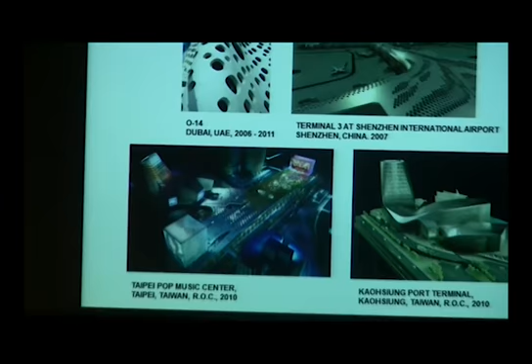These are the four projects. I'll only touch on the Shenzhen Airport project, which is a regression off of O14. But they're in very different circumstances—of course O14 is in Dubai, and the Shenzhen Airport is in mainland China, near Hong Kong.

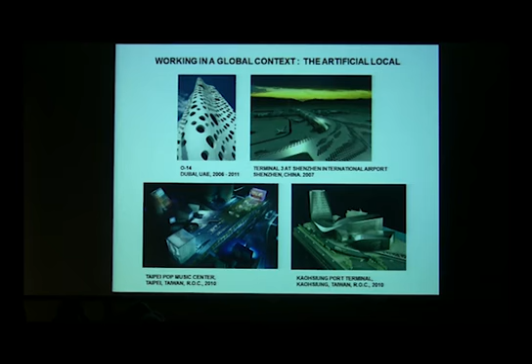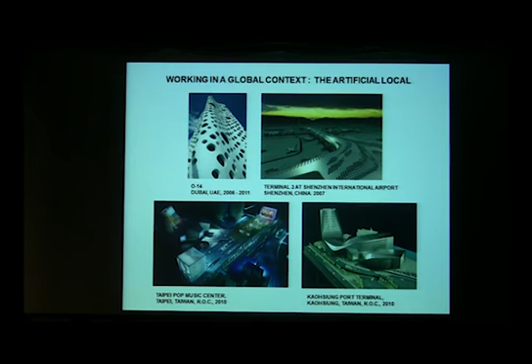The two projects we won in competition a year and a half ago, Taipei Pop, is characterized in terms of its ambitions—the ambitions of its programmers—to be a project that doesn't relate just to Taiwan, but attempts to really project its image and presence across all of Asia. They are particularly threatened by the rise of the pop music industry in mainland China, and so the explicit intent of the project is that form of projection.

And of course the Kaohsiung Port Terminal connects back maybe to a more traditional notion of maritime infrastructure—an architecture that sits on the border between land and water, and in a way partakes of the global systems of shipping, is at once part of the city, but also connects to wider, extended systems of transport and exchange.

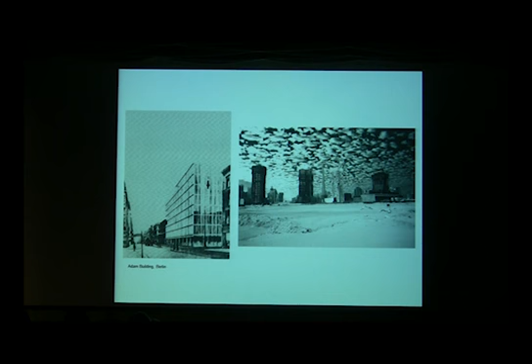The long view of the building was very important, as was another given: the issue of developer pressure. Looking back at Colin Rowe's fantastic essay, Chicago Frame, one of the quotes he puts out is that the architects accepted the conditions imposed by the speculator, and we certainly did.

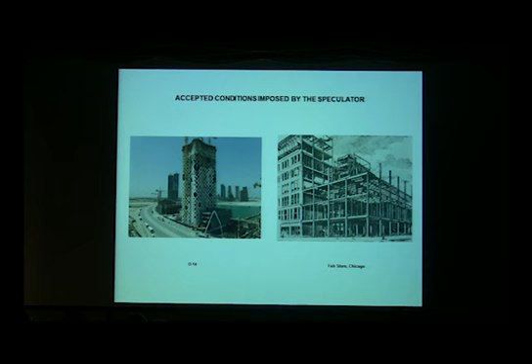But the conditions had radically shifted, in Dubai of 2006 versus 19th century Chicago. So it wasn't about putting up the most minimal frame and getting the most out of all the square footage, the most efficient building. These buildings were, in a sense, loss leaders. The iconic trumped any issue of efficiency - or was efficiency even expected? We were given a tremendous amount of latitude. The building couldn't be inefficient, but that wasn't ultimately the criteria the developer judged the project on.

The other thing that happens in Dubai at the urban level is the almost reflexive use of certain kinds of building types - the tower type, and then the creation of a back street, a back building with basically a kind of podium that the building perches on and extends behind for parking.

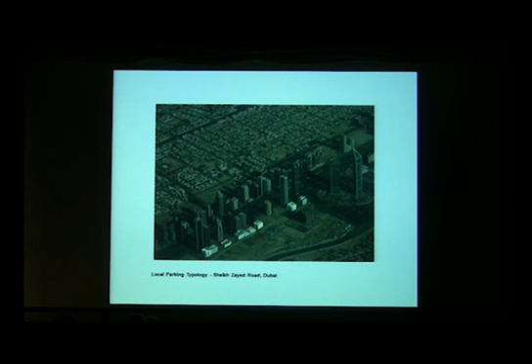So you get an active frontage for these towers along Sheikh Zayed Road here, and then a completely dead back street, occupied by parking structures.

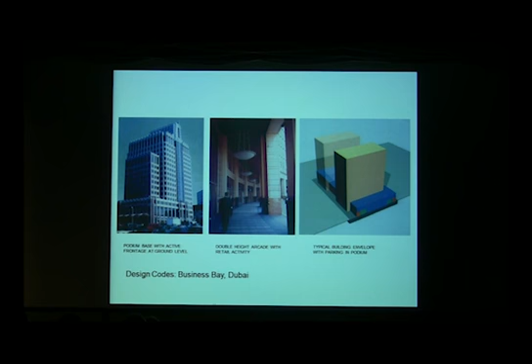So they included the podium base with active frontage, a double-height arcade, and then this provision for parking in the podium. Working with the developer, we basically tried to overturn or modify those rigid strictures.

Instead of just one level, we proposed multiple levels of activity in the building. That would assume that the buildings and the podia could be linked together. That ultimately didn't happen, so our building is a kind of little segment of the ambition.

So there's a utopian dimension to the project in that if the development were created correctly, you could actually get an active ground plane and an active elevated podium level as well. That's part of the project.

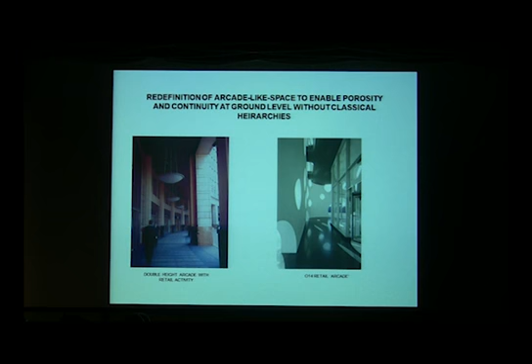The arcade in this case was reread as part of the kind of exoskeleton shell. Not an applique, but really kind of inherent to what happens if we separate the exoskeleton from the lobby and make it porous.

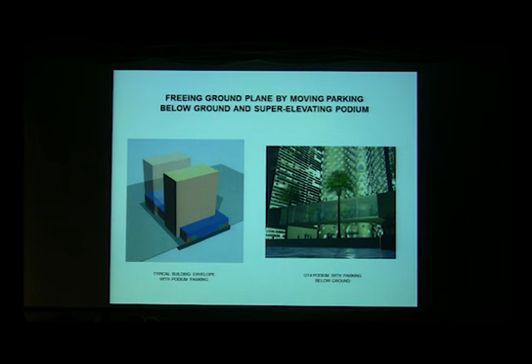It also addressed, at a purely pragmatic level, the issue of stuffing the podium with parking. Because the building was on a very prominent site next to the water, it didn't take too much convincing to argue to the developer that he should program those spaces and put all of the parking below grade.

So this diagram basically illustrates most of the issues that we were working with: this elevated podium, opening the ground plane up, a very modernist sort of move.

So the podium itself, instead of going all the way to ground as is typical when loading with parking, we super elevated it, so it's higher than the Lever House podium, and really made it a kind of gateway from the back street to the waterfront esplanade.

Okay, I'm going to digress for a second. This has nothing to do with the O-14 project, but it is an important issue for me. And that hinges on the issue of aesthetics and performance.

I am a lover of bicycle parts, obsessively. One of the things I found really interesting, I was just attracted to these things. I remember being so attracted that my teeth hurt. This came out in the late 80s, the one on the left.

The one on the right I can't stand, and I'll tell you why in a second. But the one on the left, which is a crank set, part of the C Record gruppo that Campagnolo did, came at a point when the computer was just being introduced in manufacturing.

And Campagnolo still had his old team of tool and die makers. It was very equivalent, in a way, to the situation at Peter Eisenman's office that Greg talks about, where he wanted to do drawings that looked like a computer did them, but didn't have the computers yet.

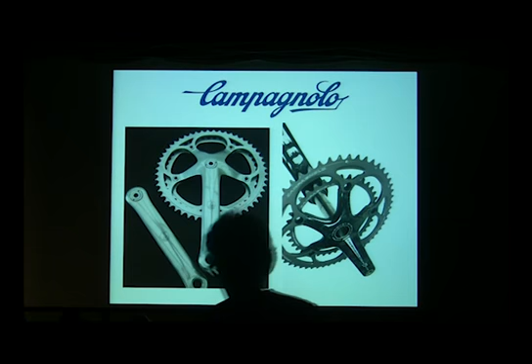It's probably a very reactionary position to take, but the gruppo on the right, which is actually done with everything now completely computerized - they're able to analyze all the stresses on the carbon fiber and lay them up and do all of that - but at the end of the day, from the purely aesthetic dimension, I would say that's a kind of a loss rather than a gain. And so I think when it comes to architecture, that's a really interesting problem.

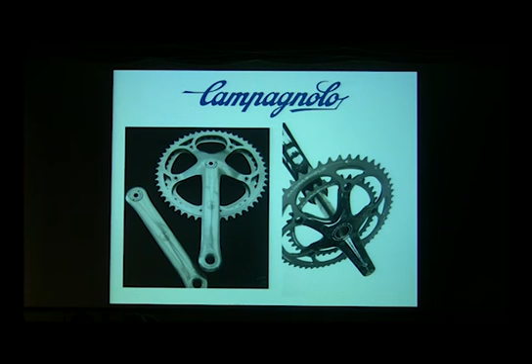Of course, it's not going to fly in bicycle racing, because the crank set on the right is going to win the races. But in architecture, performance, I would contend, shifts to the object on the left. Anyway, that's my harangue, and I will get back to the rest of the presentation.

So, one of the other things that I think is really interesting in the project, and when we're sort of speculating on the project, comes from what has happened in terms of the relationship between production now and production as it was once framed by people like Walter Benjamin.

Benjamin talks about the mountain as being quintessentially of a place, unique, original, and unmovable, and it produces the effect of a distance. I realized that now we're able to produce those kinds of effects, using Deleuzian terminology, as a deterritorialized presence that is very ambiguous, very hard to place, certainly not a rooted presence, but partakes of those effects of distance that were formerly part of nature.

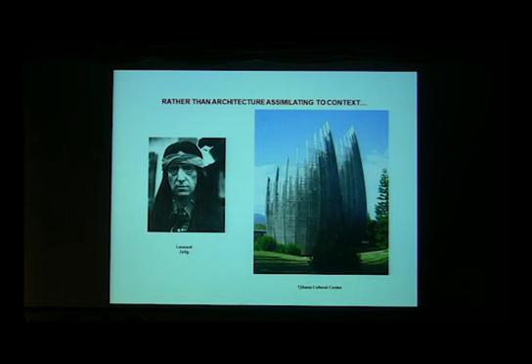So I bring up these two figures, two comedians, as illustrations. One, the Zelig model, and Zelig, of course, is the quintessential shapeshifter. He becomes anything he's close to. So that would be the old contextualism, I would say. And you see that in these kinds of projects where there's an attempt to update traditional culture, crossing high-tech and traditional culture together.

What we're really interested in is another comedic figure, the Chauncey Gardiner model, or as Jeff Kipnis corrected me, his name isn't Chauncey, it's actually Chance, and Chauncey is only one manifestation of Chance the gardener. He's characterized as being dumb as a post by the maid, and yet everybody reads deep meaning into him. He's basically a revealer of the context rather than the other way around.

So with O-14, just in the way it's been received, people have interpreted basket weaving as part of the process, and I don't deny it. In a way, I think the minor arts do kind of enter into this kind of work, but one could also say that those minor arts were, in a sense, an early kind of cosmopolitan structure.

They're sort of everywhere and nowhere. Everybody has baskets in all cultures, crosses them. Not new, but very old. And equally, at the level of interpretation, people have compared it to cheese or laundry baskets. Russians are absolutely convinced that it came from Melnikov's house. So it's a really interesting territory because it's very cagey.

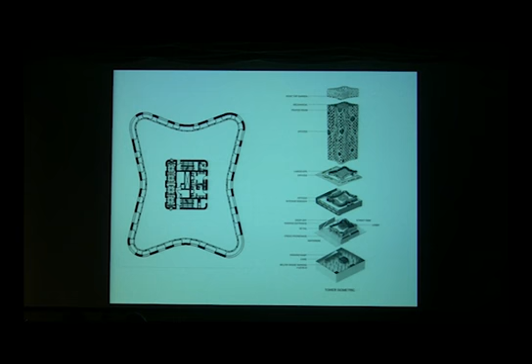So really the building became planimetrically very simple, a kind of soft cruciform structure, an exoskeleton about 1 meter away from the floor plate. The exoskeleton does all the work of holding the floors up. There are no interior columns. And because it's such a robust structure, like a reactor cooling tower, the core could also be much lighter because the exoskeleton takes all of the lateral forces that are normally taken by the core.

And the building evolved from being more of a typical column frame building. It was also mixed use at the beginning, so there was residential in the deep cruciform, and then it bellied out to office in the first iterations. The market changed, there was a redesign in terms of the kind of programmatic demand, and then it became only office.

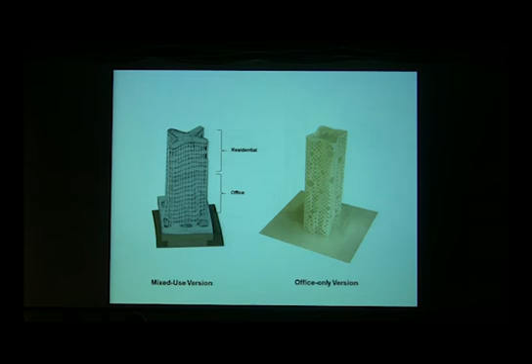And again, looking back at Rowe's article on Chicago Frame, I was particularly struck by one of the digressions when he talks about the anti-frame, which is the Frank Lloyd Wright St. Mark's Tower. And in a sense, and again this is kind of retrospective analysis, the O-14 project is sort of the inverse of the Wright project. The Wright project has a very strong central core that carries the building, cantilevers out, and has these spinning trays.

Our building takes that kind of central core and expands it out, and then the slabs hang within. But it is related, I would say. It's probably the closest project I can think of in the lineage, away from the frame. And then this is notionally what happened in the project: the columns migrate out to the surface, become an exoskeleton.

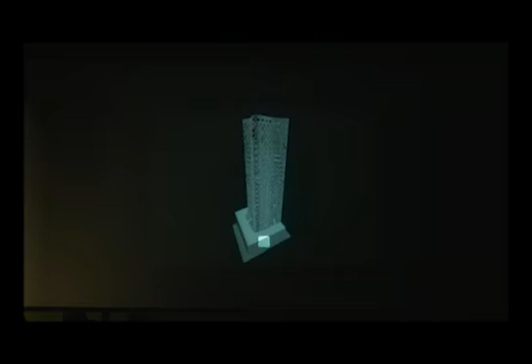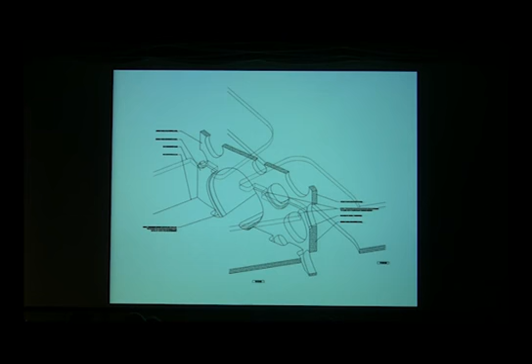There were very interesting moments too when working through the changes in thickness of the exoskeleton, where the shell changes thickness abruptly above the podium. So we had to find ways of detailing the openings that crossed over that transition zone, which created a kind of reveal that you can maybe see in some of the photographs, and in this isometric, that basically overlapped the two different shell thicknesses.

And as a consequence, I would say, of the use of the exoskeleton, we found that it induced a chimney effect. So after talking with a mechanical engineer and adjusting the number and thickness of the connections, we were told you could achieve a 30% reduction in cooling costs. But that was really a kind of byproduct of other interests and agendas, rather than something we focused on explicitly in the beginning.

That leads me to another thing - I don't know if it's a harangue, but it's something I think is really important to think about, and something that was really troubling me for a long time: the issue of sustainability and how we, in our profession, deal with that. And I realized that at one level, the purely quantifiable aspects are fairly free of architectural content.

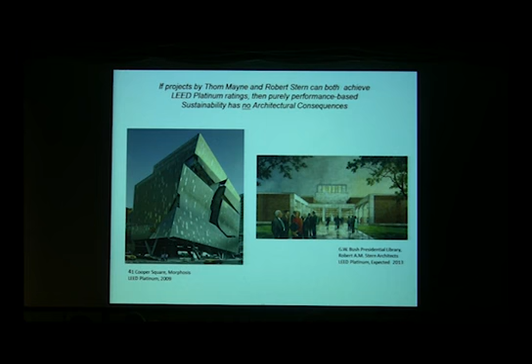Both of these buildings have LEED Platinum ratings. They both perform on a purely numerical level the same, and yet their forms couldn't be more different. So if Thom wants to represent sustainability, that's fine, but it's really not necessary - it could be anything, when it's purely based on performance criteria, which I'd say is a liberating condition. And I thank God there's no sustainable style. Not to say we don't and must follow those constraints, but they really are fairly neutral relative to architecture.

This doesn't work. The other thing we were really working on in terms of the detailed design of the form of the building is that we finally weren't going to be so much involved in complex form, but that all of the complexity would reside in the pattern.

So I was looking at two kind of contrasting models and trying to put them together. One is a kind of featureless monolith - I was really struck by the pyramid of Cestius in Rome, where you really couldn't tell how big it was because it had no features on it at all. So in the mist it could either look gigantic, or when you got up to it, it was actually shockingly miniature. On the other side, a figure with excessive features, a disruptive camouflage pattern. Bringing those two models together was really our interest.

I'm going to the wrong one - I think I'm going to a completely wrong animation. I don't know how this skipped. I think I'm going to need some technical assistance here for something I've juggled. So that's way at the end. I want to go back. Keep going, keep going, up, up. Okay, yeah, thank you. Very fluent in PowerPoint.

One of the things we started to play around with, because it is a diagrid structure, was to try to defeat readings of height. We realized that in a normative diagrid, you get the slabs to line up with the crossing points. So we deliberately put those out of phase, and it becomes very difficult to read the floor levels as a result.

There are even blogs that attempt to compare and contrast and figure out those things. So we were successful, and worked through a lot of different iterations. Also here, the goal was to try to defeat obvious flow lines through the diagrid - to track the actual pattern of flow that would follow along the diagrid. So we got a series of discontinuous cusps that could transmit the forces sufficiently, but didn't read as an emphasis of the diagrid.

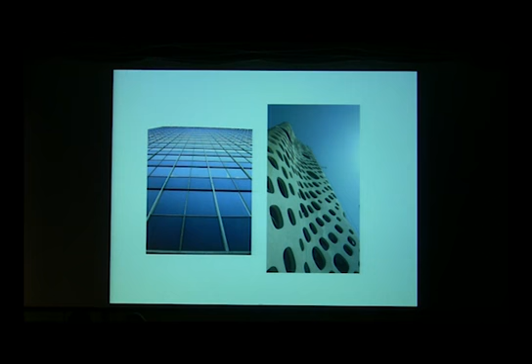Another thing that was important in producing this facade was the kind of up-close experience - very different from the one-point perspective you'd get in a typically gridded curtain wall situation. Instead you get different speeds of diminution and expansion across the facade, rather than focusing on one point. It also resonated with some of the stuff I saw as a kid, the Sea of Holes in Yellow Submarine, where up and down, side to side becomes very ambiguous. So in certain aspects, you get that kind of effect.

The other thing was the issue of the office space itself, and the question of how the office might be occupied in a spec office building.

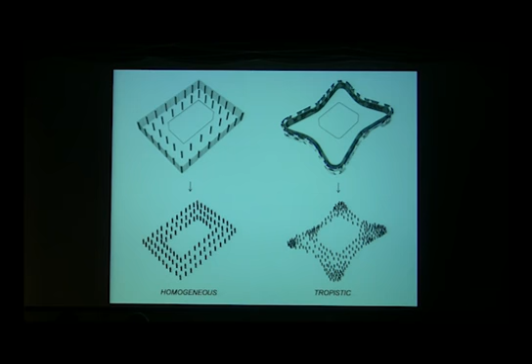So these are speculations, really, since a building persists over time. The hope is that there would be a much freer way of using this space, depending upon whether you want to be close to a lighter zone or a darker zone, and how you would lay claim to a space when you have technologies that are light and allow you to be flexible and not fixed to a certain part of the office. And so there's also a more concrete set of effects that operate too.

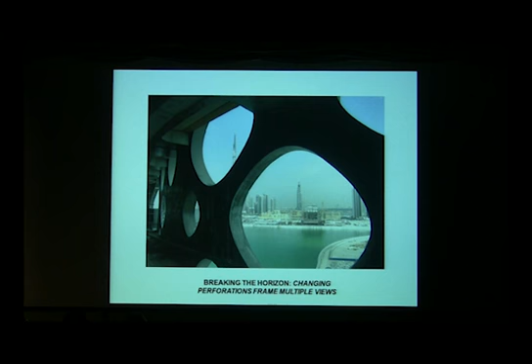Because this diagrid is a meter away, you don't have a kind of reinforced horizon like in the gridded buildings, but are able to get strange oblique views up and down and to the side, past the level of the slab lines.

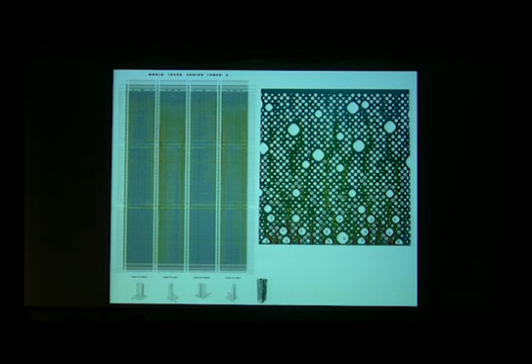I'd also like to say, in terms of the way we do projects in the office, we don't restart projects from zero, but try to take material we've been thinking and working through and apply it in a different way. So this is our proposal for Shenzhen Airport.

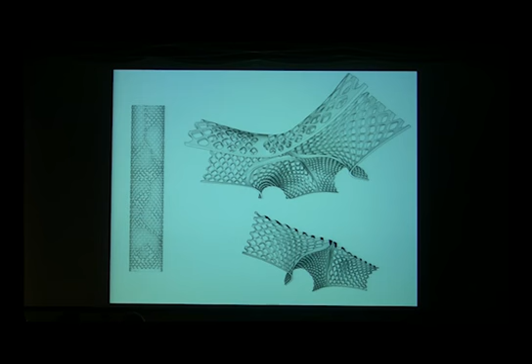I won't talk too much about it, but in effect it's the development of the O14 model on its side, upping the ante. So instead of completely perpendicular cuts normal to the shell, we began to explore the idea of varying the sectional cut, essentially keeping the outer fenestration completely regular—so the cladding and glazing would be regular, but everything behind it would shift.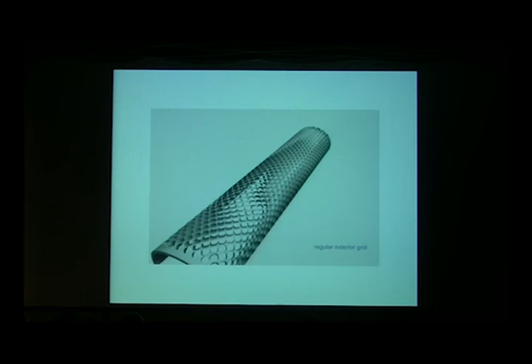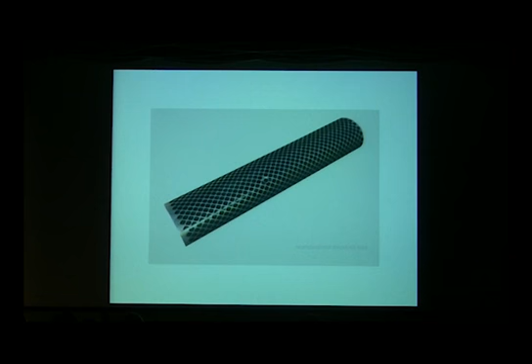That would produce a whole series of atmospheric effects in the vault, and you get a kind of virtual form emerging—it might almost look lumpy or irregular, but actually has a completely uniform cross-section. Here are the glazing panels, demonstrating that the outer surface is regular while you work with the sectional variation.

That then also connected to different agendas, whether we were putting fenestration in laterally or on top of the vault. So people traveling on the travelators could get glimpses—there would be a periodic use of holes angled toward gates that you could see from the travelator—and then another pattern agenda for the roof, which was much more atmospheric. We also experimented with reintroducing massive columns to direct people in the space and really make a plastic sense of the space, not doing clear free spans anymore, but really exploring the issue of the column.

In terms of fabrication—jumping around here—for O14, we originally had rubber molds that could be reused. That was dispensed with by the contractor, and we instead used foam molds that were automatically cut with automated wire cutters, and they were waste molds.

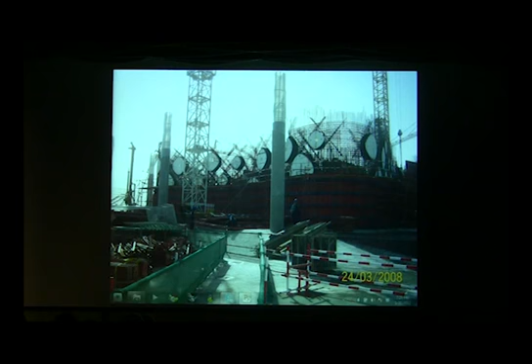So they would pour the concrete around the opening, and then it was smashed out with hammers. The building was a kind of learning experience, certainly for us, but also for the contractor, because there were no clear precedents about how to deal with placement of formwork and efficiency.

This was one of the early shots when they were placing formwork up in the diagrid, using transits to level them and so forth. They finally came up with a much more straightforward projection method, where they blew up images of the unfolded pattern onto the shuttering, and then placed them directly.

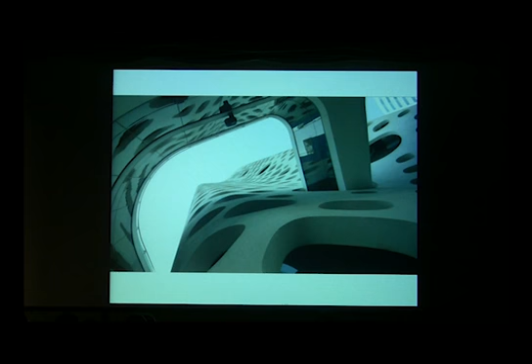This is just a view from the top of the building when the shell kind of emerges free. Ridges that connect the podium move through the shell, from the podium through the shell to the office space. And again, that gap in the lobby space, and one of those views between the glazing and the shell, with the ability to look up into that space.

The reception desk took longer to design than the building. And then a view from the back, so you see the podium wrapping the back of the elevated podium, a super truss that allows for the cantilever.

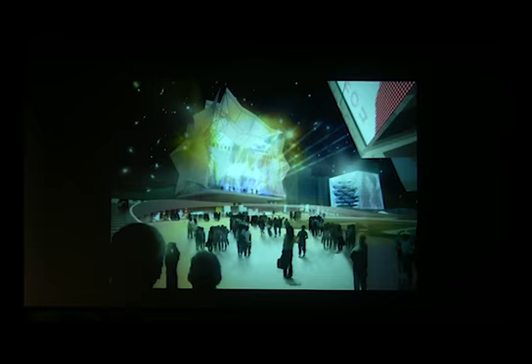Okay, I'll move on to the Taipei Pop Music Center. As I mentioned, it was a competition held about a year and a half ago, motivated by the perception that the music industry in Taiwan, while it was really the originator of pop music in all of Asia, was rapidly being overcome by the burgeoning industry in mainland China. So they wanted to finally give an identity, a place for the production of Taiwanese and Asian pop in the city of Taipei, and they really wanted to create a new kind of precinct in the city that would do that.

So the site is actually two sites, a very difficult connection of two sites: one across this Xinsheng Road corridor, a very long site, and then this more rectilinear site, bracketed by two major subway stops. It's right now an industrial area.

So our idea was to create not only the buildings, but to create this precinct that would bridge across the road, creating a new elevated ground. It would be connected to the city, but would also clearly be a very different experience once you ascended to that new plane and encountered the different programmatic elements of the project.

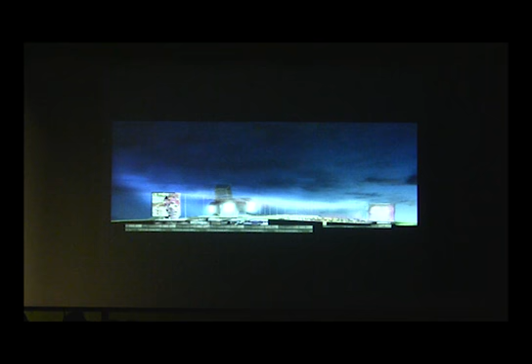So that cube on the left contains the Hall of Fame, and carved into the face of it is seating for 450 people to look out over the complex to see the events, and also for Hall of Fame induction ceremonies and so forth.

The idea we started the project with was that we didn't want a stadium, which would be a completely closed organism, separate from the city, but some form of a modified circus scheme, where instead of closing the ends off, we would open the ends to the city, and one would gradually rise up, and then that simple circus axis would branch off and connect to the adjoining site that would have the auditorium on it. So the main circus form was for the outdoor performance space, and then the other areas.

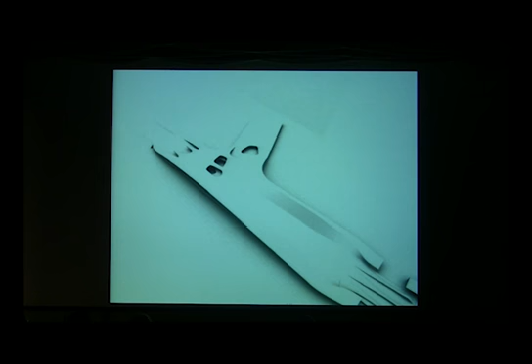So this is the notional animation of how that worked: cut the two ends off, elevate, and then bridge. And then the basic components are there.

One of the things - this third component is a stage. The stage in this position is for the 14,000 event, but it's proposed as a robotic stage that actually runs across the site and connects to two different places, to the other elements.

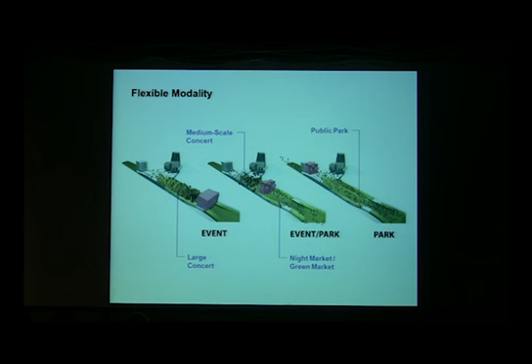The issue of flexibility was also very important for the urban operation of the project. For a large concert of 14,000 people, the stage would be at the far end of the site, essentially closing off the site. But if the stage moved, in its wake you could have a completely open and free event park. And when the stage went all the way over and essentially kissed the cube of the Hall of Fame, it became completely open park space.

This is a view from the main auditorium looking at the robot stage as it's parked in front of the main hall. This was an early rendering of the open 14,000 person venue, and we were proposing at that point a median net that provided some shade but could also be illuminated. You'll see that in an animation shortly.

This is another modality for when it's an open park, a view from the Hall of Fame cube. That eroded face has seating for 450 people, so you get a very intimate performance space and scale. We were really trying to work through the various permutations of scales of performances and types.

This would most likely be more of an acoustical performance, not an amplified one. We ultimately ran into real trouble with amplified sound in the open space, so I'll show you where the project is now. But this is the view during the competition—you can look out over that completely open space from the cube.

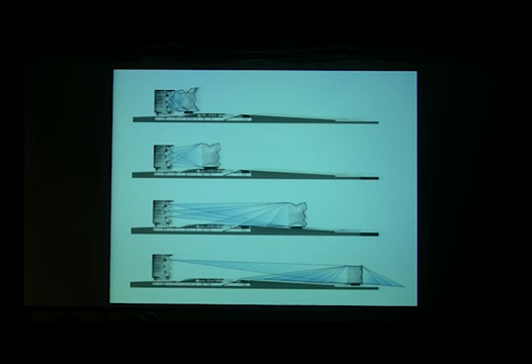The end. Yeah, this is good. Yeah, this is fine. Thank you.

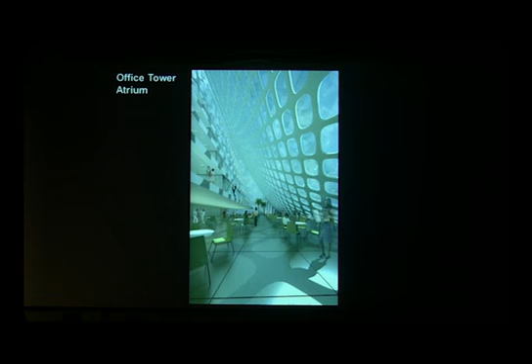This is one of the vertical spaces in the office tower that's above the atrium space, above the theater. It's really a kind of thick, elevated ground plane that would actually be occupied with shopping and have all kinds of functions within the thickness of that elevated ground.

This is the latest iteration, a quick rendering. We've basically had to enclose the outdoor space entirely because the sound codes in Taiwan are so stringent that they require library-level sound around all the buildings, which is somewhat absurd because the noise of trucks and cars is actually much louder than their sound code. But this is the battle we're facing now.

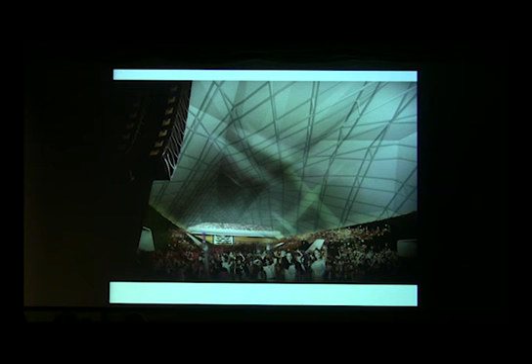The outdoor space is now an enclosed space, and we're making the end of the space modifiable so it can be opened up and then closed for performance. But the idea of keeping the public space open remains, so one can walk or use this vast shed for activities other than concerts. It's now got a kind of hippodrome form with a cantilevering balcony and a U-shaped audience, but the central area is essentially just a series of gentle flat plateaus that allow you to walk through the building, using this as a kind of enclosed and outdoor park space.

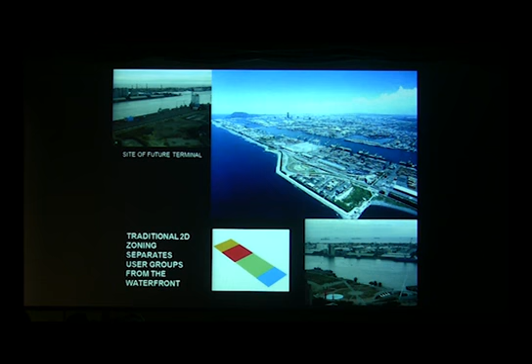At the planning scale, we argued—because we had to produce a master plan as well as a piece of architecture—that the 2D zoning basically was holding back the way you could reconceive the use of the site, because it only dealt with programs on a plane. So what we proposed as an edge condition was to sandwich the uses.

The industrial uses and service functions would happen as they do now, at grade. The specific architecture of the terminal would happen in between, and then there would be yet another level which would be open to the general public. So that was the very basic sectional notion of the project.

And that's really what we carried through at all levels. So the idea is not to mix all of those realms together. They would be kept very distinct because they shouldn't be mixed. And because you're dealing in a way with a situation very much like an airport, where there are clean zones and then public zones. So the general public is above on a kind of esplanade. The functions of the terminal happen in between, and then the port uses happen down below.

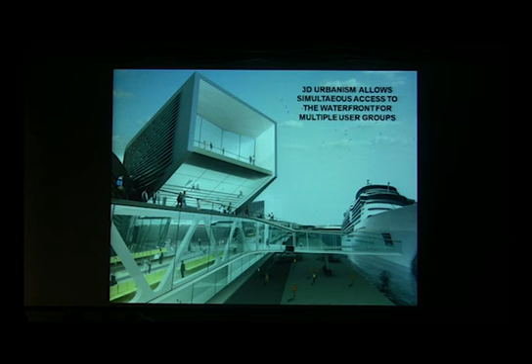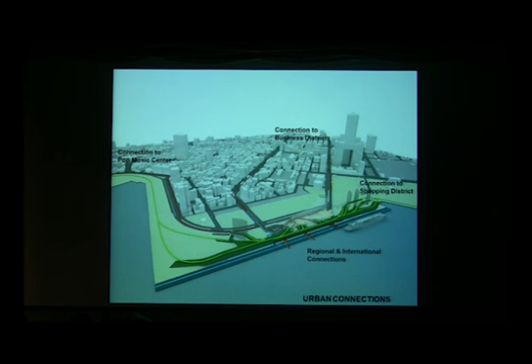And that model then, in our proposition, gets extended along the entire waterfront and would house different programs, and they would engage the different strata in their own ways, and also connect back to the city. And the building itself doesn't simply sit on that promenade podium, but actually lies astride it and connects to the various functions that the building has to do at each level.

On the main level plan, there are very direct routes to the cruise ships that use this terminal and fast ferries. So there's a three-lobed form, and then the fourth lobe is actually the tower for the Port Authority. So that's sort of the center of the Port Authority in Kaohsiung.

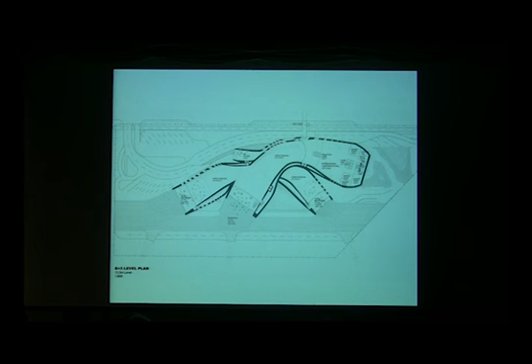We'll move to this location. But it's all appended to this long boardwalk structure. And we worked with poché in the plan, basically to put all of the vertical circulation into the space between the walls to keep the basic spaces pretty clear.

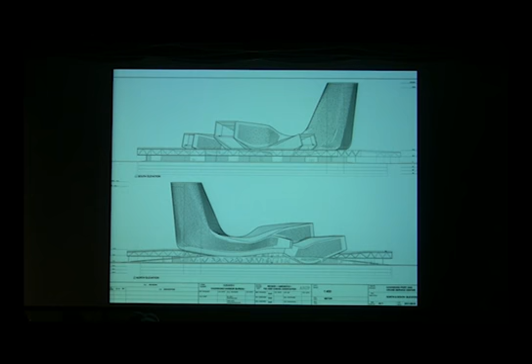So it is an evolution, I would say, from the ideas we were working through in the Pop Music Center. Although the kind of functions are almost the complete opposite. This is a kind of centrifugal project, the other one kind of centripetal, everything goes to the center. This is a distributor.

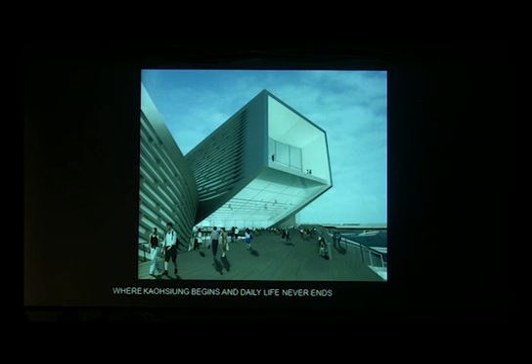And it was very important to open up each of the lobes down below to create openings to the water and to feed the boardwalk into the terminal at a certain level so that you could look down into the goings-on in the terminal, yet not be directly involved with the terminal uses.

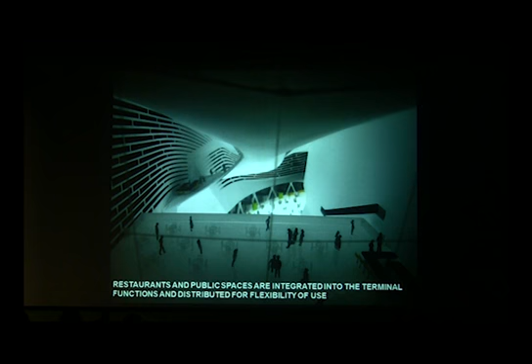Another issue that was raised in the competition was the fact that these cruise ships are really periodic visitors, and so for a large part of the time they expect this place to be pretty quiet. So we had to come up with a scheme also for distributing programs and uses around the terminal that would keep it active.

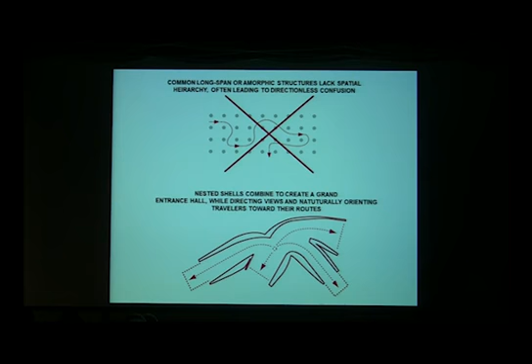And the idea really was that with the introduction of the elevated boardwalk, the general public could connect into levels of the terminal and even use certain parts of the terminal that wouldn't be used, like the waiting areas, for other kinds of functions, other kinds of events. But it was a project that was very figural, not a kind of open gridded terminal plan, but a really directed set of spaces, almost like a carburetor or a distributor that would shunt people to the boats or to the land.

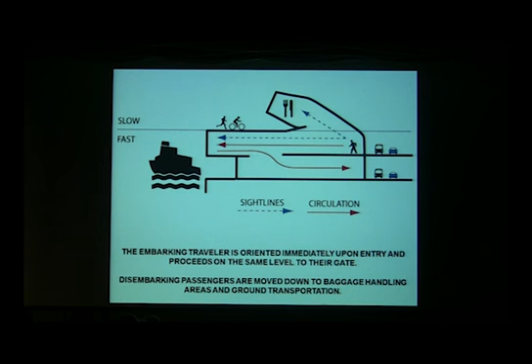And so there also, beyond that, the idea that, like in an airport, it was a bi-level sort of section. Departing passengers would stay on the level right to the boats. Those disembarking would go down a level for pickup. And then you would always, because the spaces were kept pretty clear, have a glimpse of what's going on in the elevated boardwalk. And if you had the time, you could go up to that level and go to the restaurants or go to the shops that would be at the boardwalk level.

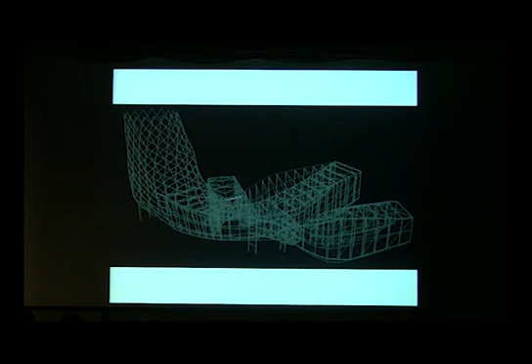And this was the structural concept, which is still substantially there, where there was a kind of diagrid for the tower. It's one continuous structure. There are no breaks. It behaves that way, which is very good, apparently, in the seismic area. And there are a series of large, like bridge trusses that hold the lobes, structure the lobes, and they connect to that diagrid in the tower.

And so the building really breaks up from the water, becomes more a series of objects, and then from the land side appears much more continuous. So I'll close now with a short animation.